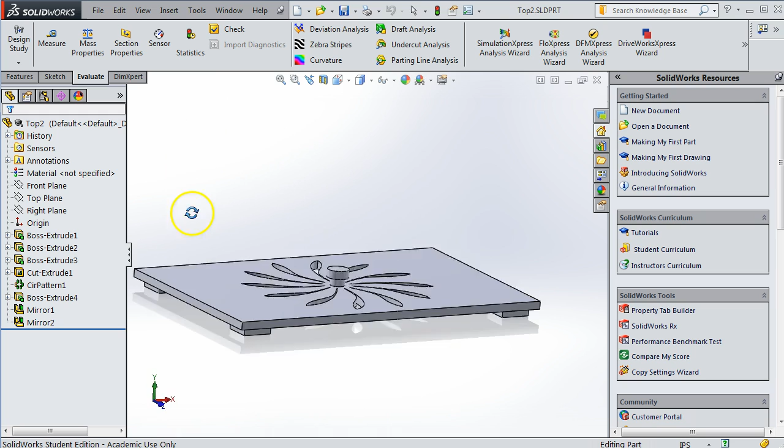Now I actually have two lids that I'm showing because I have in the videos an alternate way of making the lid or the top. So this top you can see is located by those four pads, and I'm going to show the method for the other top as well, which is located by little notch cutouts. That's the alternate method. So as long as you have all of them open, just make sure they're all there, then we're ready to make the SOLIDWORKS drawing file.

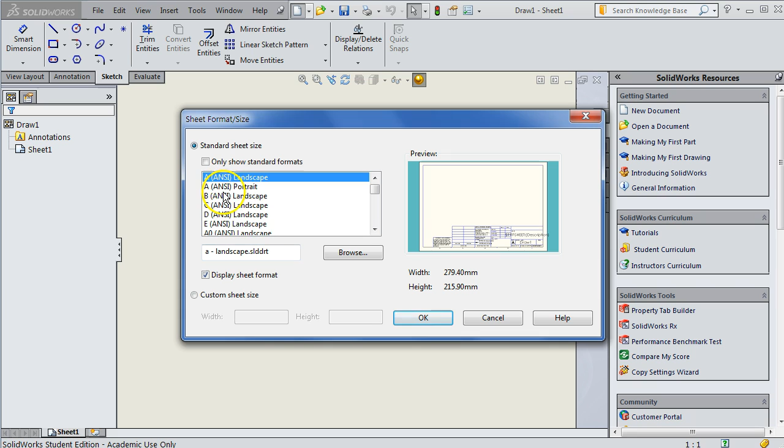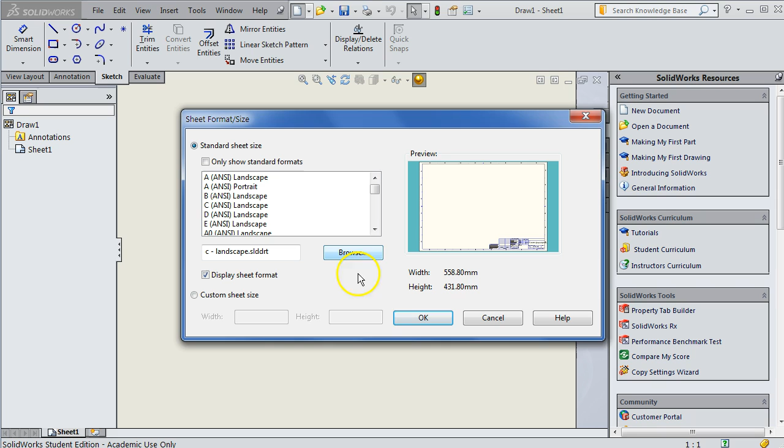So to do that, click on New, and now we're going to select the third option, Drawing, OK. And in this list, I would recommend the ANSI C format. That tends to be the format that uses a 1-to-1 scale. And so that's preferred. It also has plenty of room for our parts. If you don't see that in your list, then maybe uncheck this box. You'll get more selection, or you can always browse for it there. And then we'll say OK to that.

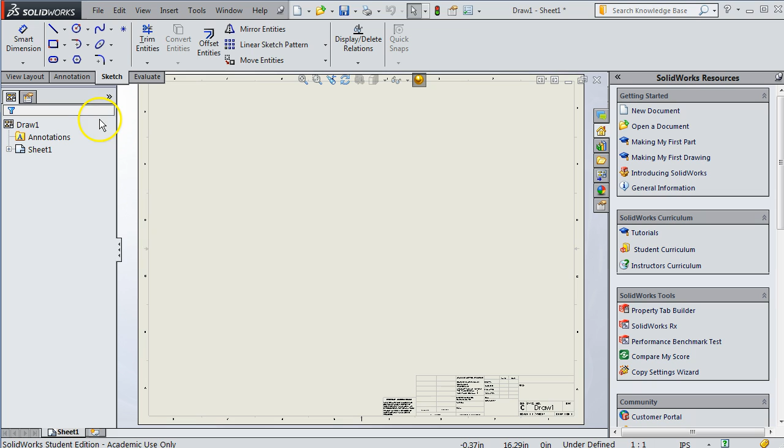Now that sheet format usually, in my experience, comes in metric, or at least on my computer it's doing that. So if you get MMGS here, then make sure you say IPS. Okay. And there's two ways to add part views to this sheet. You can see this is a drawing sheet, like professionals use in industry. It's got a title block and things like that.

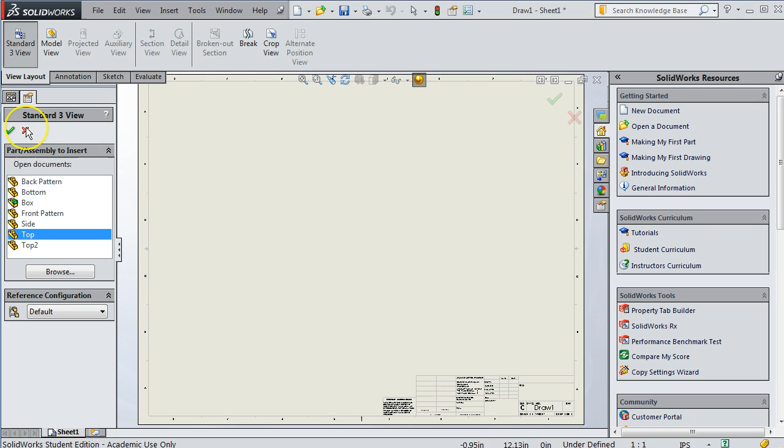The normal way, not what we're going to use, but the normal way is in View Layout. You'd click on Standard 3 View, and all your parts would be here, and then you would pull them in. But for laser cutting, this is not the best way. So I'm going to X out of this. The best way for laser cutting is to pull the parts in from what's called the View Palette.

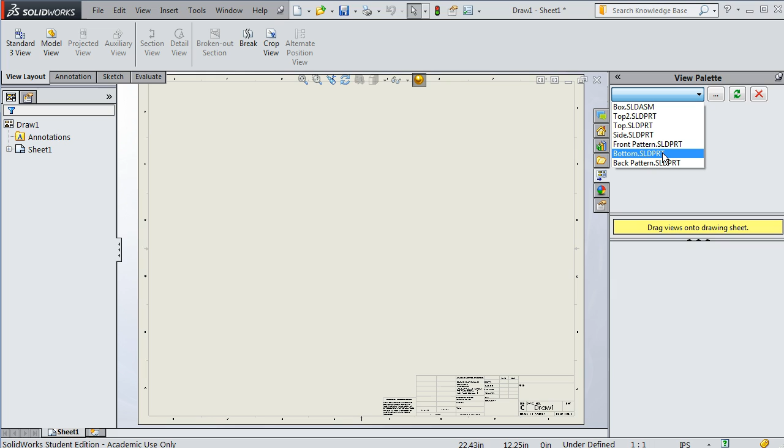So that's right here. So I click that little View Palette icon, and now I get a set of parts in this drop-down menu. So you can see that's the same list I had before. So I'm going to select the bottom of my box first. And the nice thing about the View Palette is it gives you a preview of the view that will be pulled in instead of guessing, which is what tends to happen over here.

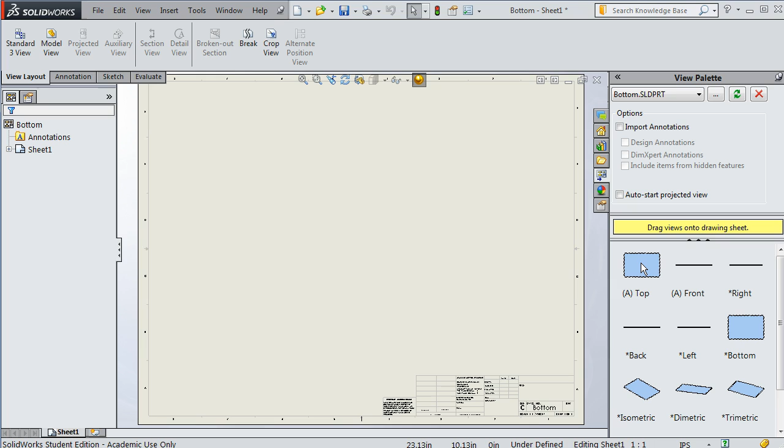So we only need this view for laser cutting. That view and that view do nothing for laser cutting. So I'm going to click on that, drag that in, and then let go to place it. Now, the first thing we want to do when we place it is to make sure this came in as 1-to-1. And the way to be sure of that is I scroll down here and I want to see scale, and I want to see these be 1-to-1. If they came in as 2-to-1 or something else, let me show you what to do.

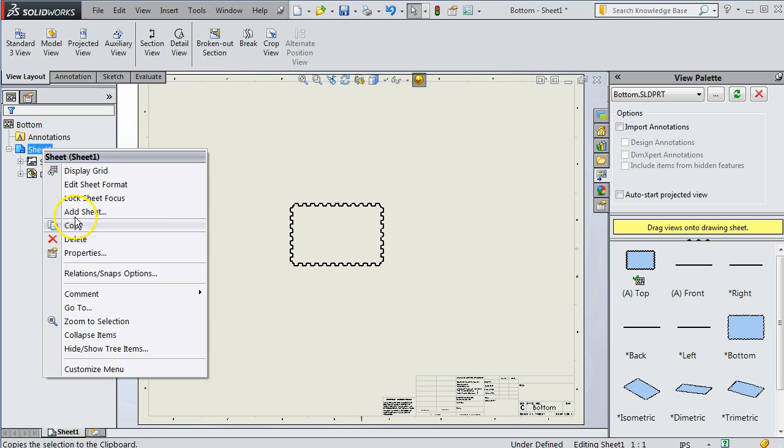I'm going to hit green check to accept that. Right click on Sheet 1 right there. Then go to Properties there. And this should be 1-to-1. If it's not, change it to 1-to-1. So I'll cancel since mine's fine. So we've got our first view, and now let's select some other views. Now your view palette might have disappeared on you after placing that first one. The way you keep it out is the pin. So click there and then click the little pin to keep it there.

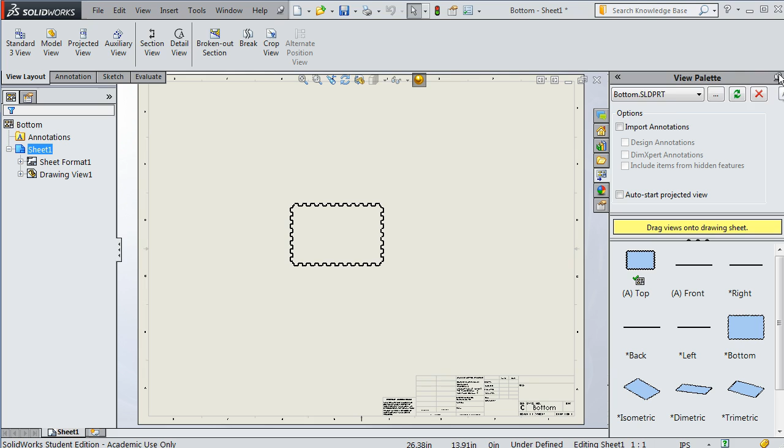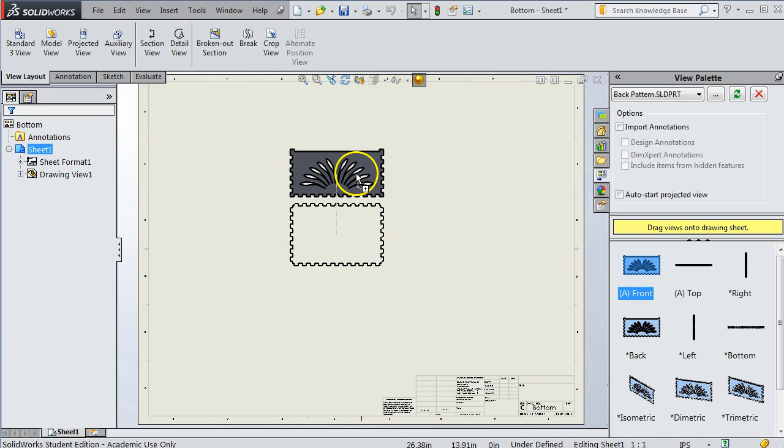Okay, now let's place the views for the rest of our parts. So let's see, I'll take a back. And there are all the views of my back, and I'm dragging in a front, and I'll place that back relative to the bottom, so that would be like that. And let's see, how about I do the front next, and I'll pull the front in, and I'll place that relative to the bottom.

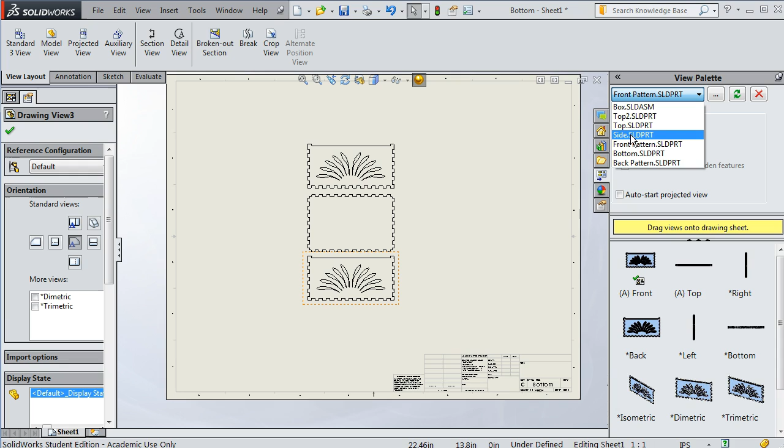Then we'll do sides. Now I only have one side part that I used twice, so I'll click it and pull it once in here to be to the side of the front. Then I'll simply use another view there, click and drag, and let go to place that one.

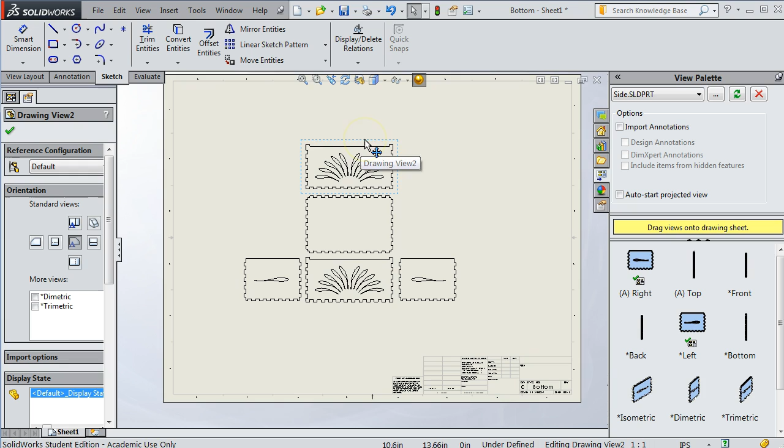Now you may have noticed that when you place these views, you don't have complete freedom where they go. For example, let me move this view. You get it to have the blue outline, and then I'm pulling it up, and you can try to pull it over, but it won't let you. See that? It's controlling the location of these views because it understands there's a relationship between this view and this view. That's why you don't have complete freedom where they go.

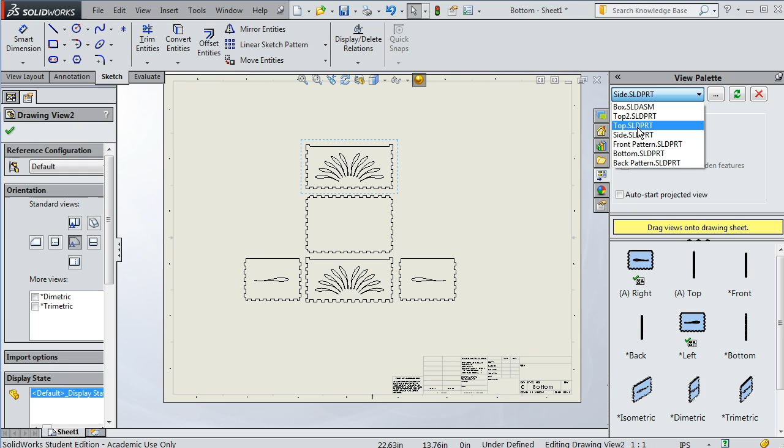Okay, we need a few more views. We have the side, and I'll do both of my tops so that I can show you the method for both. This is the top that actually goes with this set of drawings, so click that and drag it in. You could put it off in a corner for more selection, but once you get close to other views and it understands the relationship, it's going to plop it in a particular spot. So I'll click there to release that one.

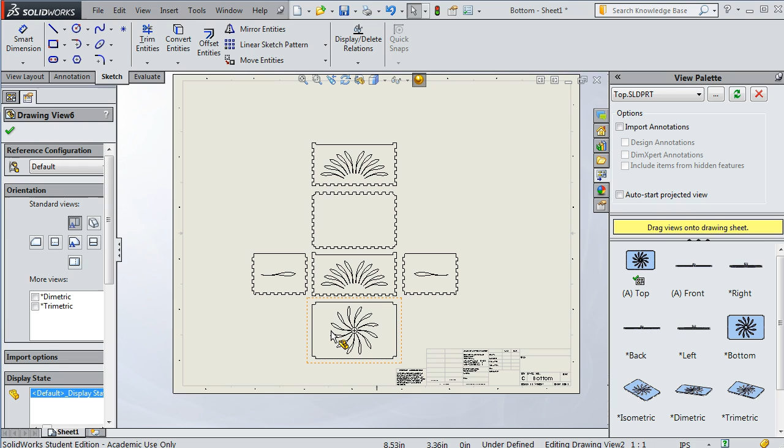And last I'll do my top two, which is the one with the four pads on it. I'll just put it somewhere like there.

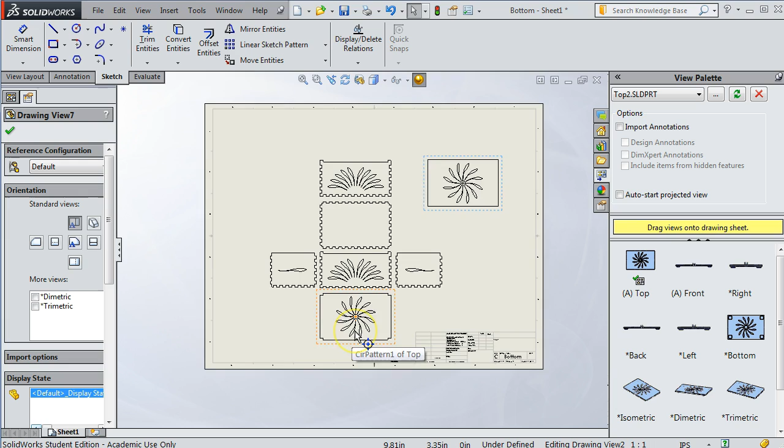There's a few things we need to do to clean up the drawing before we exit. Look for any of your views that have circles, and any circle will probably have this little center line mark. We don't want to laser cut that—that's a drawing symbol. So the easiest way to delete it is simply click it, make it blue, and then hit the delete key, and it's gone.

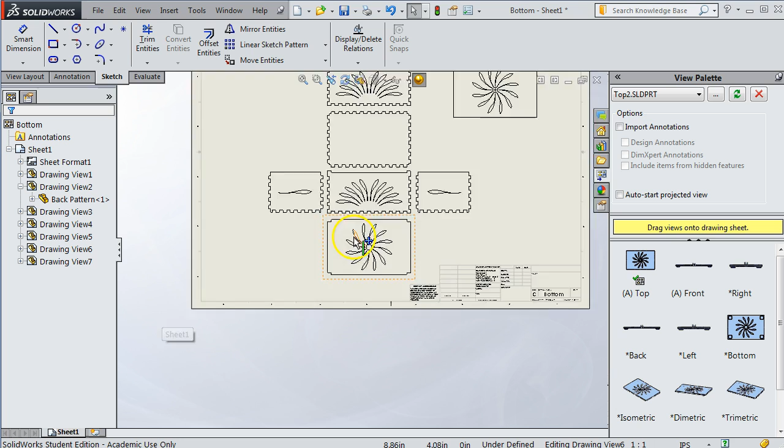So I'll do that for both of my tops, and you would do this for any circle on your part—click and delete. There is a setting if you have a lot of circles to not show them, but most people don't, so I won't go into that.

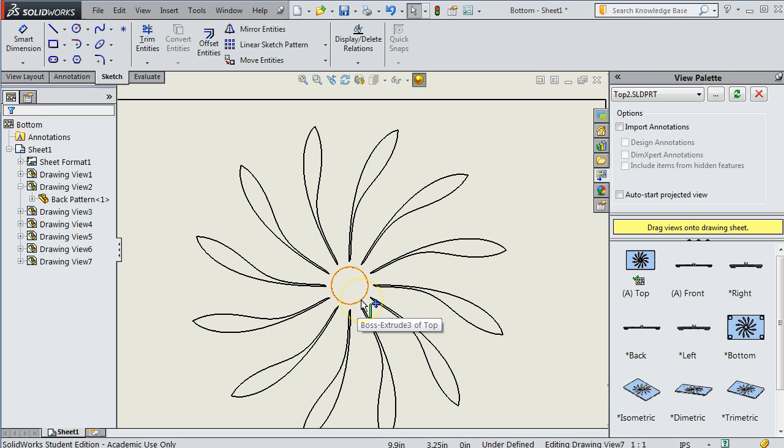You'll also notice that when I look at this handle, I don't see the stem inside it, and that's because of the default way these views come in. So let me click on this drawing to select it—you get the orange line around it. Now let me scroll down here to the display style. The default is hidden lines removed. The one you want to select is called wireframe, which will show every line in the part without visibility questions.

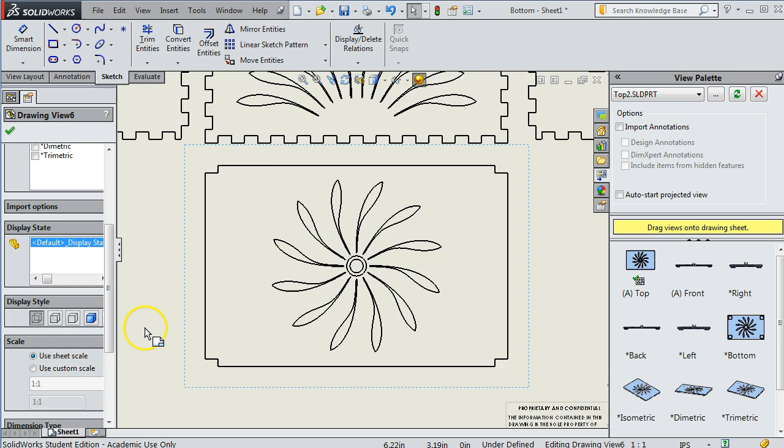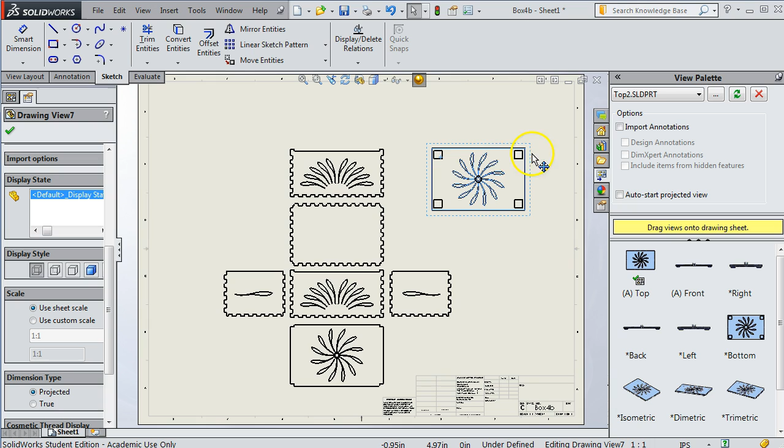So click on wireframe to make sure your stem will show. I also want to set the hidden lines visibility for this lid because it has little squares in it and I need to be able to see those. So I select that view, scroll down, and click on wireframe for the display style. Now you can see it's going to show the little locating squares, which is important because we want to laser cut those later. Okay, I'm hitting escape to unselect that.

Next we want to save in two ways. First I want to save this SolidWorks drawing file. So File, Save or Save As—this is a SLD DRW file, and you can give it any name you like. SLDDRW, and save that. I've already done this once, so replace it.

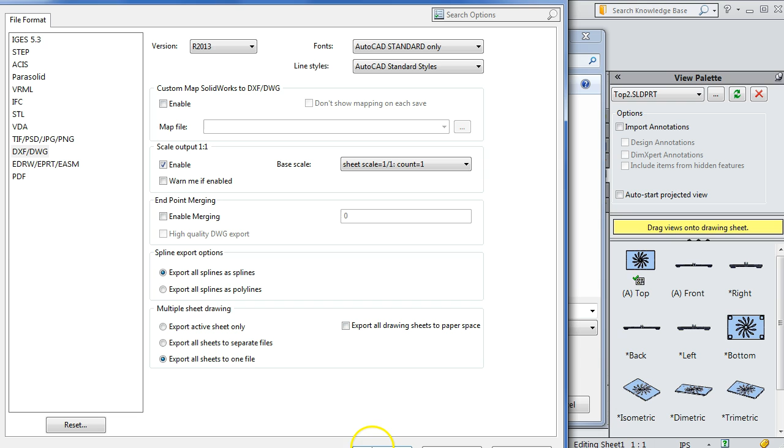Now the important save for laser cutting is we want to save this as a different format. So I go to File, Save As, type DWG. This is a very old format, and it's the one that AutoCAD and the laser cutter will understand. Make sure you click on the Options button and make sure the Scale Output is enabled and that these say 1:1 as well. The OK button is just off my screen here, but you can see me click on it right there.

If I close SolidWorks now or minimize it, I'll go back to my list of files here, and you can see it created this SLD DRW file, and it also has this DWG file I just created. If you're on a USD lab computer, you'll have progeCAD on all of those machines.

So you can right-click here, then open with, then progeCAD. If you're on your own computer, let me get this started, so I'll try it. This is a trial version.

If you're on your own computer, you can download a trial package from progesoft.com, downloads section, and that'll work for 30 days. When progeCAD opens, it'll look like this.

This is the SolidWorks drawing file that's now exported, and we need to clean this up and prepare it for laser cutting. There's a number of steps to do.

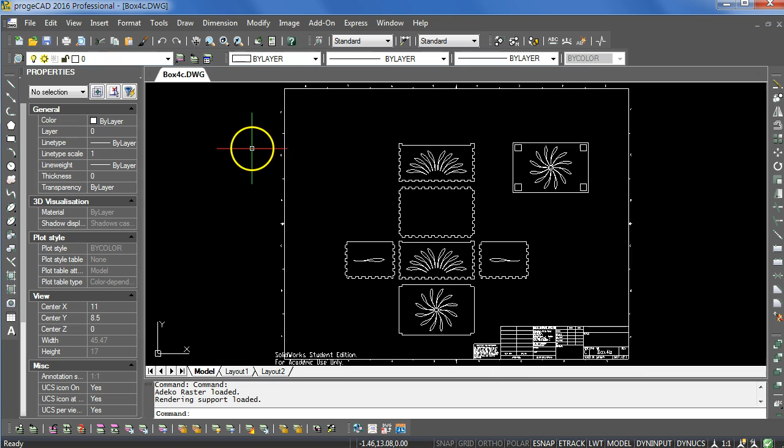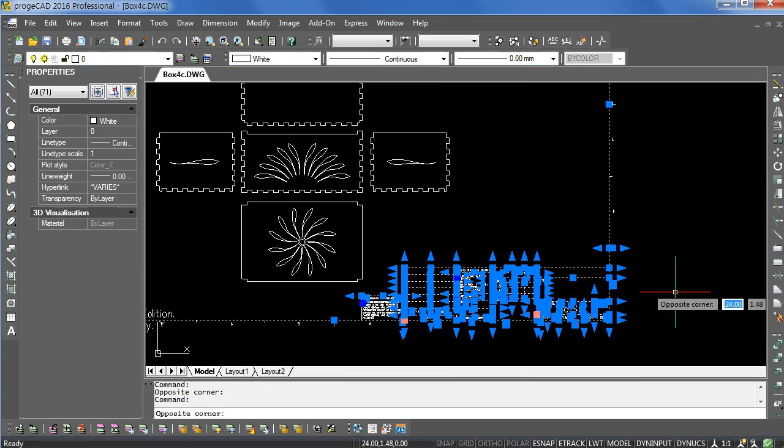First thing I want to do is eliminate these lines. Let me show you a feature of how things are selected in AutoCAD, progeCAD, and other clones. If I select by clicking here and dragging to the left, then clicking again, notice it selected everything within that box, and also things partially within the box. Now contrast that - I'll hit Escape to unselect. Contrast that with clicking and dragging from left to right. Now it selects stuff that is only entirely within the box, and doesn't even select this line since it wasn't fully within the box. That's a handy and important way to understand how selection occurs in most CAD packages.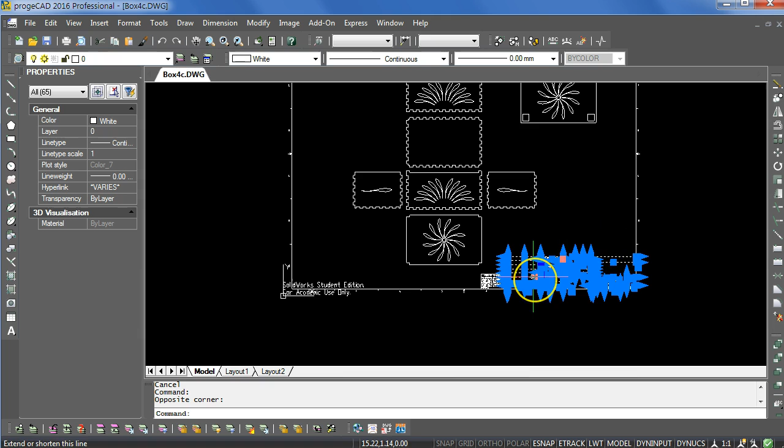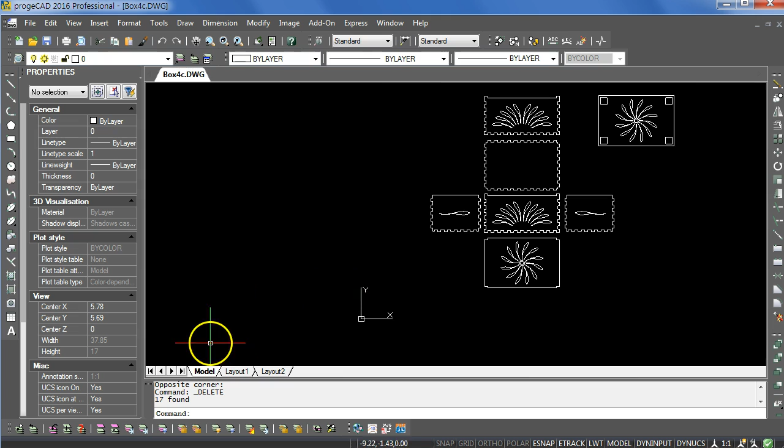We want to delete that because we don't need it in the laser cut file. So click and drag to delete, and delete - just make sure you don't delete any of your important views. The last thing shown is the coordinate system. That cannot be deleted. There is a way to hide it if you want to, but it's usually not much of a problem, so I'll leave it.

Probably the single most common problem when we export things from SolidWorks to laser cutting is that the scale of these views is off. It can be off by 1/2, by 2, by 4, or by 25.4, which is of course the metric to English conversion.

So to check that we're working with a valid file for laser cutting, let's check a dimension. Go to the dimension menu and then go to linear. Hover your mouse near a corner and you'll see it grab onto that. Click there and then click there, and check that's the dimension you intend to occur.

If you got a metric number, that's probably because in the SolidWorks drawing file it was set to a metric scale, so you could re-export it in that case. If you got a half scale or a double scale, that's probably because the view scale was wrong in SolidWorks, but in another video I'll show you how to rescale right within progeCAD if that happens.

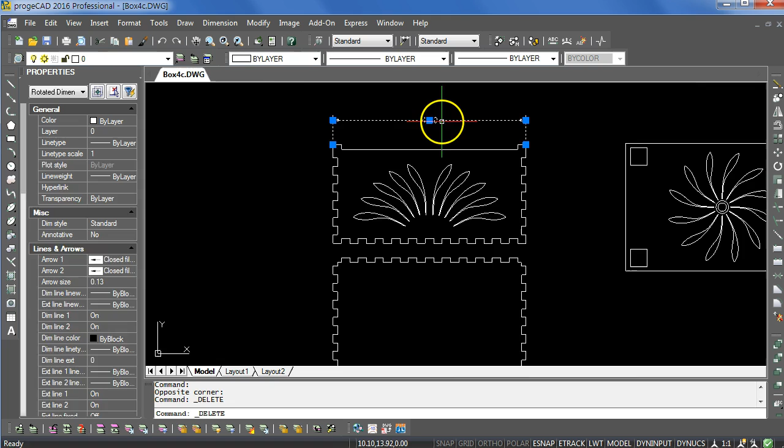So that's correct, so I'm going to select that and delete it. My scale is now correct.

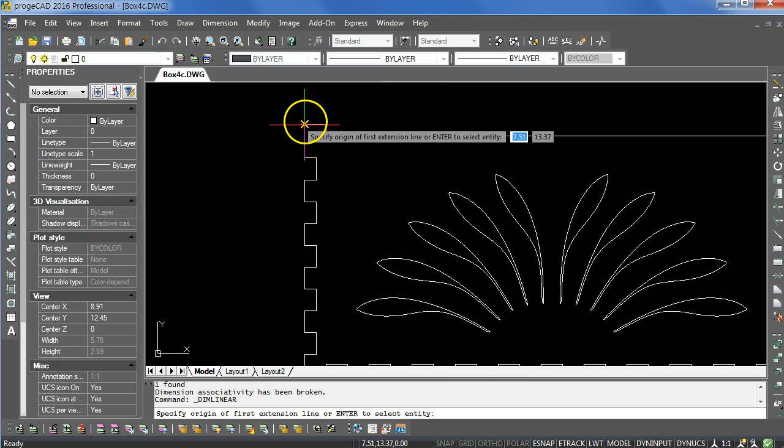You'll probably notice that the way selection is done can vary in progeCAD. What I mean is, will it grab onto that corner? So if I want to draw that dimension again, here it's grabbing onto the corner, snapping to it. That snap behavior is sometimes desirable and sometimes not. The way you control that - I'll hit Escape to get out of this - is down here. See all these gray and white words? These are various ways in which selection and drawing are controlled.

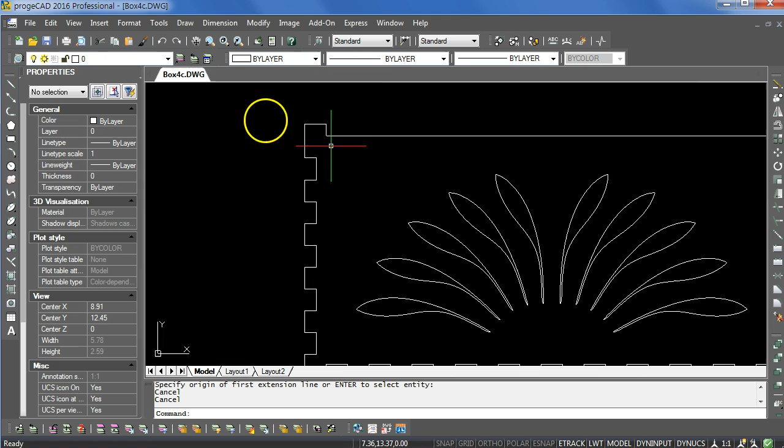The one controlling that last behavior is called Entity Snap, or eSnap. If you want to turn it off, just click it and make it gray. I would recommend all of these be off: Snap off, grid off, ortho off, polar off, and eSnap off. That'll give you the most flexibility for placing parts for laser cutting. In other kinds of modeling, you would want some of them on, but for now make sure all of those are gray.

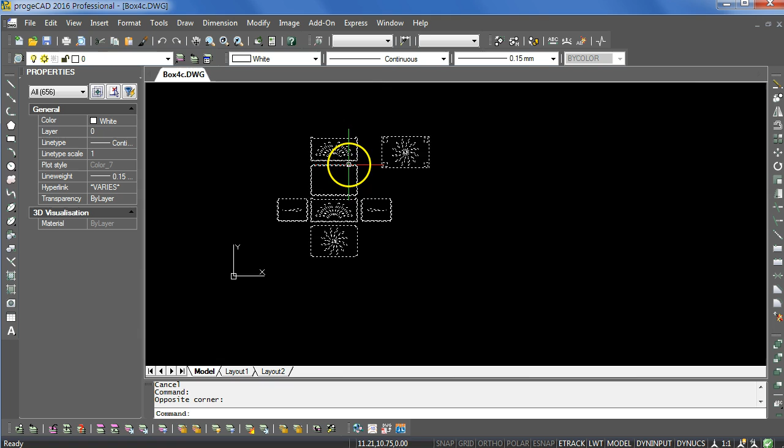Some other laser cutting preparation: let's get all of our lines within view, and let's select everything. So they're dotted lines you can see when selected, and sometimes you get colored line markers. It doesn't really matter which one occurs.

Notice the line width - that's right here, and this is the default for SolidWorks output, 0.15 millimeters. That needs to be changed to 0 in order for the laser cutter to interpret this drawing properly. Had we left it at 0.15, the laser cutter would interpret those lines not as lines, but as pictures, and it goes into a completely different mode - not one we want. So let's select 0, and it will understand those are lines to be cut or etched.

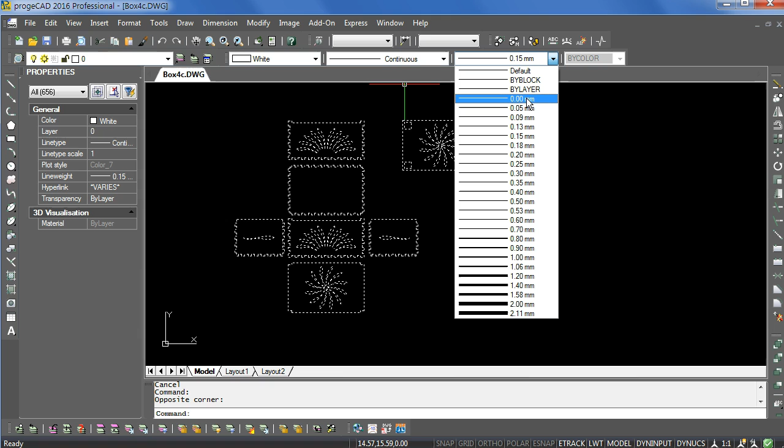Okay, so now they're all 0. I would recommend first setting them all red, and then we will change those that we want to be etched to white. So they're all red. Now a red line will be a cut line.

It'll have full laser power at a slow speed. If there are lines you'd like to be white, we'll select those one by one. But while it's all selected, there's one more command I'd like to do. AutoCAD and progeCAD work by icons to draw things, but they also work by text input right here, particularly the command window. This is very handy. Some commands are either most convenient or only available by this method.

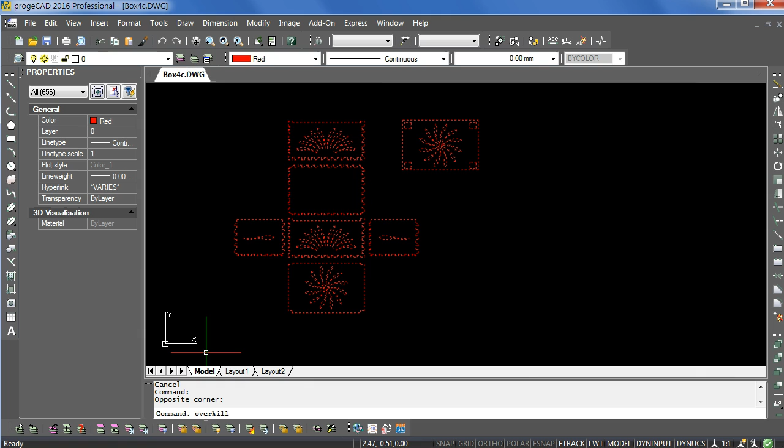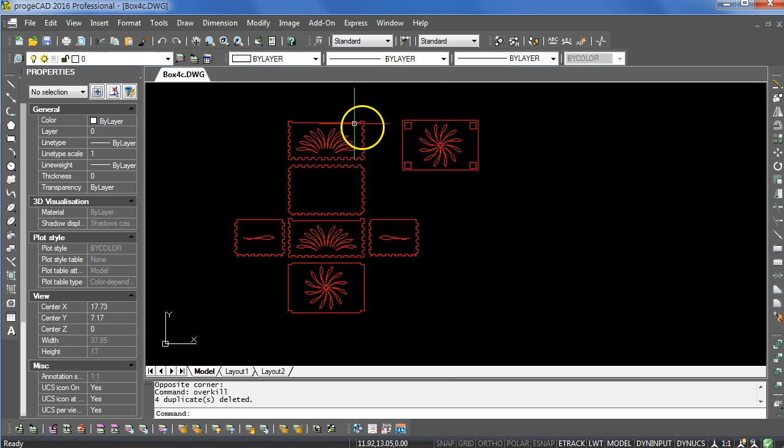The command I want to type is overkill, one word, hit enter, and the defaults for this dialog box are fine, say OK. Now it's searching through all of those lines looking for lines that were on top of each other, duplicate lines. It found 4 duplicate lines and deleted them for us. Typically I find those duplicate lines are due to the stem, because for some reason SolidWorks outputs 2 lines, one on top of the other. So we got rid of those lines.

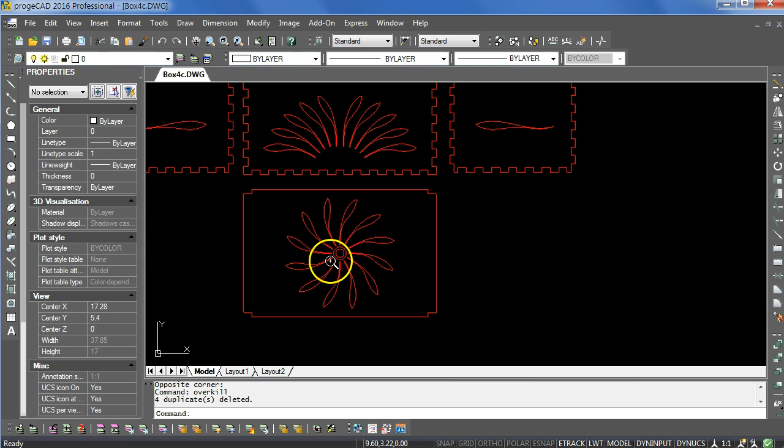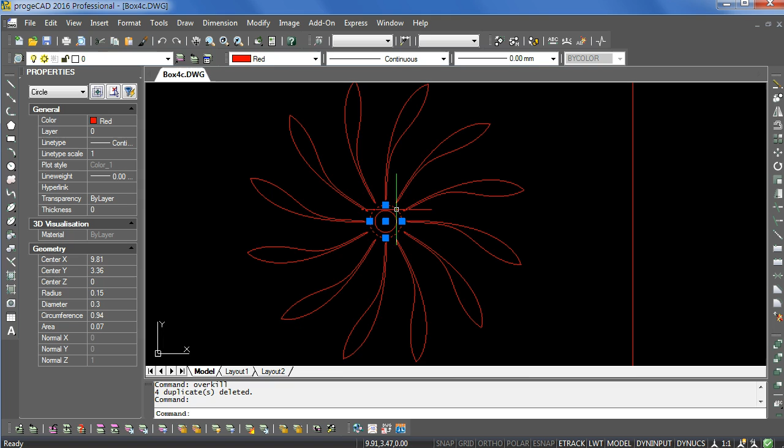Our next step is to correct the lid, the handle, and the stem on the lid. Right now it's just giving you a view of this top or lid as seen from above, but we don't want to laser cut that—that's going to put a hole in our part. So I want to get the handle of the lid off of that part, and I also want to get the stem within it off of the part as a separate part.

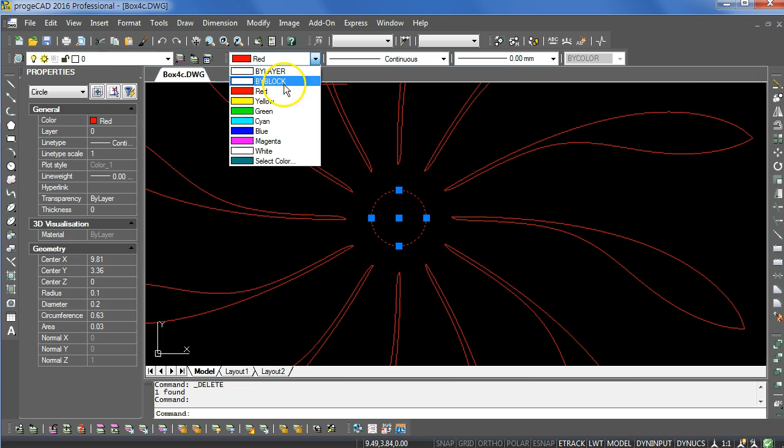So I've selected them both. Now I'm going to hit Control-C for copy, Control-V, and click again, and there they are. I'll hit Escape to unselect the middle parts, and delete this one, because I don't want any line or laser cut there. But I would like a locator to tell me where to put the stem, so I want to change that line from a cut line, red, to a white line. I go down to white, and now I have a white line there.

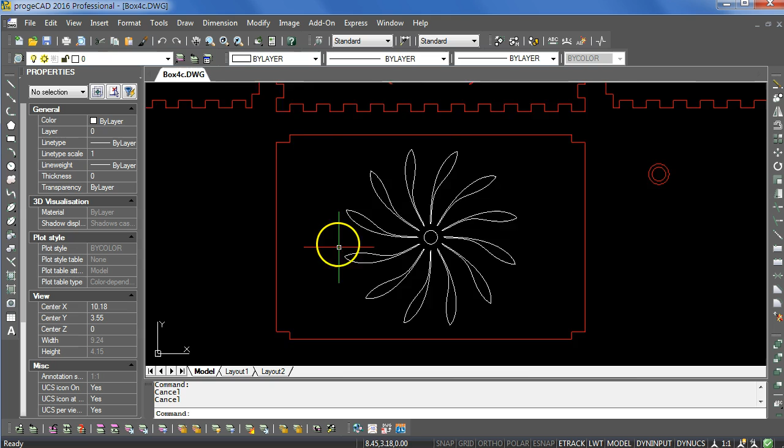You can now select any lines you want to be etched and make them white. For example, if I wanted these to be etched instead of cut all the way through, I would select them all and make them white, and hit Escape to unselect. So I've pulled off the lid, handle, and stem.

If you have this kind of lid or top, we need to pull these off so they're cut as unique parts. For that, you really only need to pull one off. So I'll select that, copy, and now paste it with Control-V, and put it right here. Then you can just paste it 4 more times. Paste, paste, paste. Okay.

I realized I did a step there I didn't show you intuitively, and that's how to pan. Pan is done with the middle mouse button—I click it down and I can move around my 2D screen. That's kind of like rotating in SolidWorks.

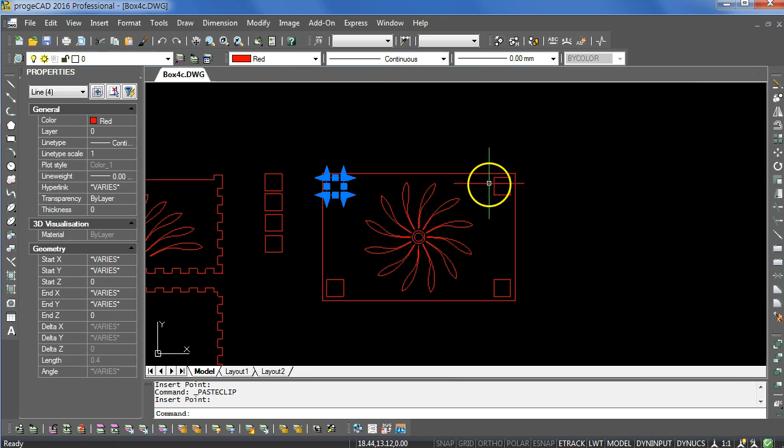Okay, now these we for sure don't want to be red. We don't want to cut holes there. Whether you have them white or nothing is dependent upon the rest of your design. So first let me fix this so it's correct. We'll get rid of that one. I'll make this one white.

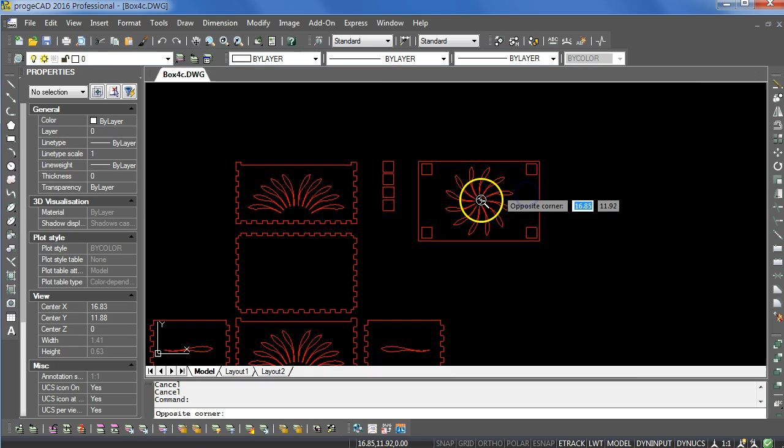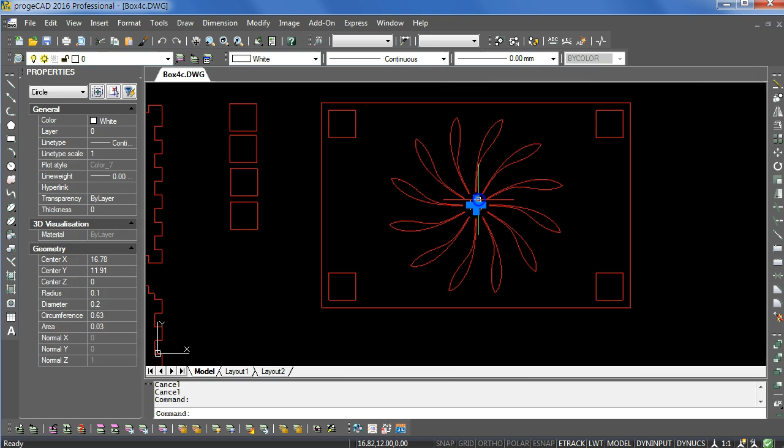Now if I want that to be white and used as a locator, then this view is going to be the outside view of the top or lid. And if it's an outside view, then these must be gone—I can't have them at all. But if you had no etch lines on your top or lid, I'm going to delete this one. If you only had red lines, then you could make these white, and now that will be the bottom or inside view of the lid.

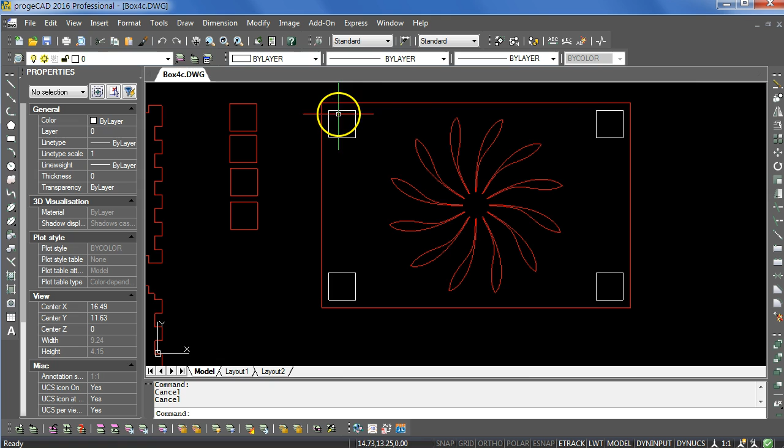So if I make those white, these will help you know where to glue them on. It's really not a big deal if you don't have them here at all—we have another method of locating them, but it's also nice to have them show where to put them. So if you have a lid located by corner pieces, we need 4 of those corner pieces outside the part, and we either need the locators here white or not visible at all. If they are white, nothing else should be white, or else it would be forced to be the inside.

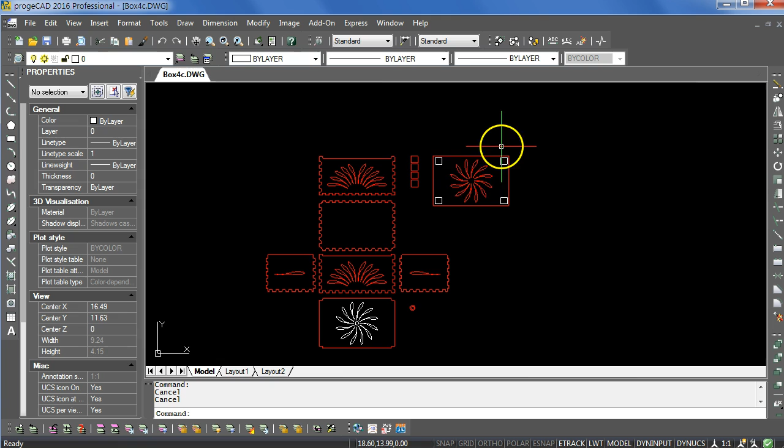Okay. Now we find that small pieces like this or smaller tend to get lost in the laser cutter. There's a honeycomb table that they can fall through. So I always recommend making 2 copies or more of those parts. So I'll just paste another set right there. So that's copy, Control C, Control V.

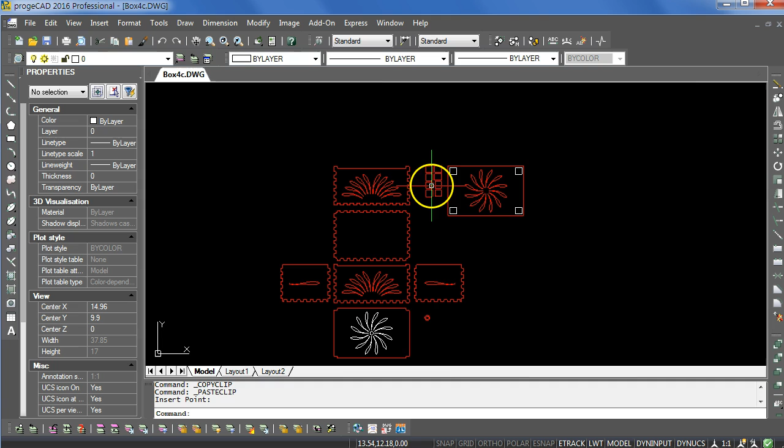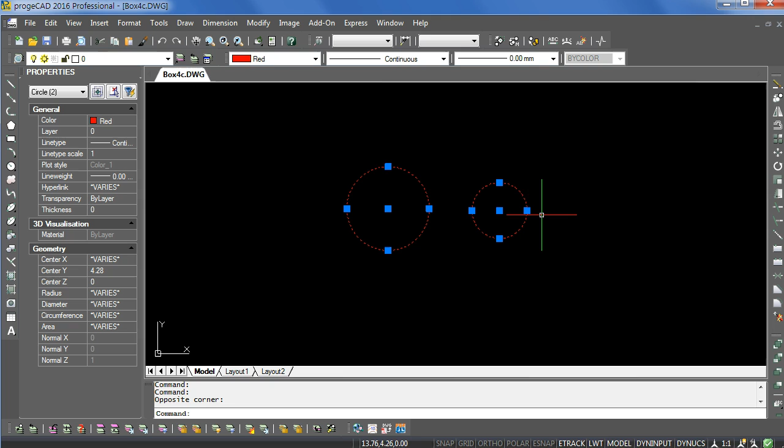Similarly for the handle, I don't want this as I've seen it here. This will have a cut line and it'll have another cut line right inside of it. I want this as a separate part, so I need to drag it out over there. And these are very small. These are the easiest to lose, so I'm going to make 3 copies of these. Copy, paste, and I'll put one there, and then I'll make another one there.

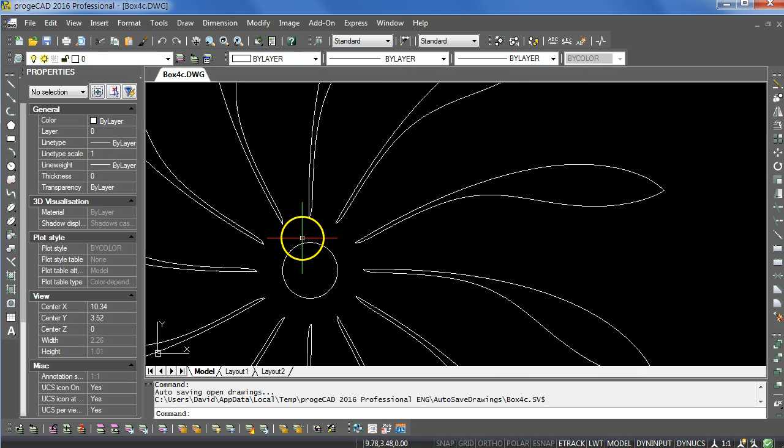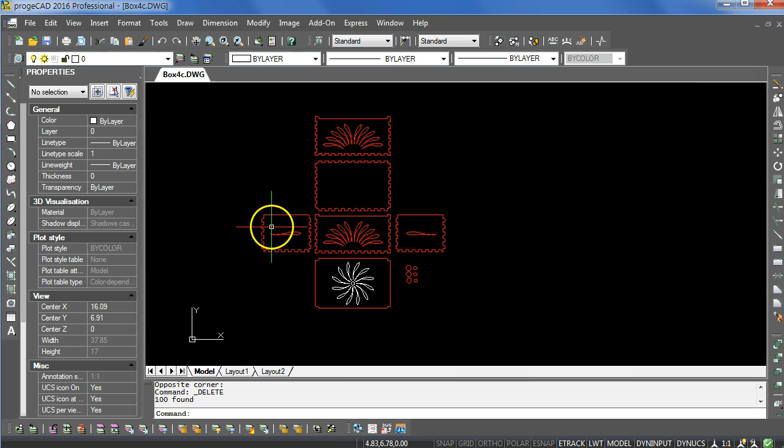Okay. So your handle and stem need to be red and separated from each other, and you don't want a handle in addition to the stem there. My last step for preparing this is to arrange these parts so that they take up less room on the wood to conserve the amount of wood. So first I'm going to delete this because my particular box doesn't use that design, so I'm just going to delete all that. You can see my layout right now is not super efficient because I have this little part off to the left, and I'd like to group it more with that one.

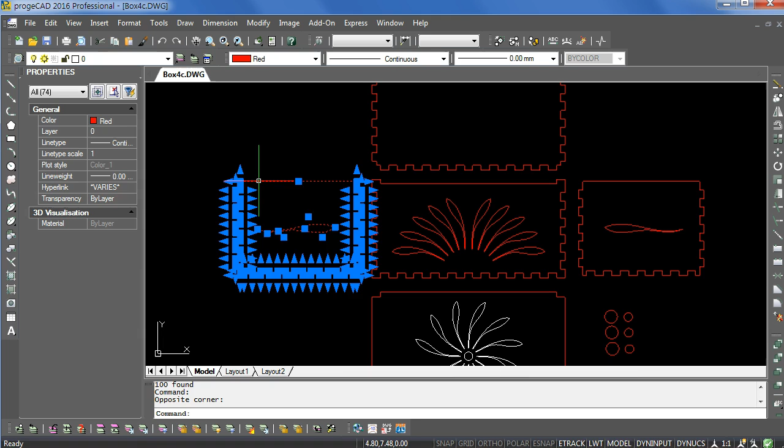So let's move that. So I'm going to select that, and now you can either drag it off from a line, or you can say Control X for cut, and then go to where you want it and say Control V, and then paste it into place. And now you notice progeCAD has no intelligence about where this is placed, so you can put it anywhere you want. So I'll put it there.

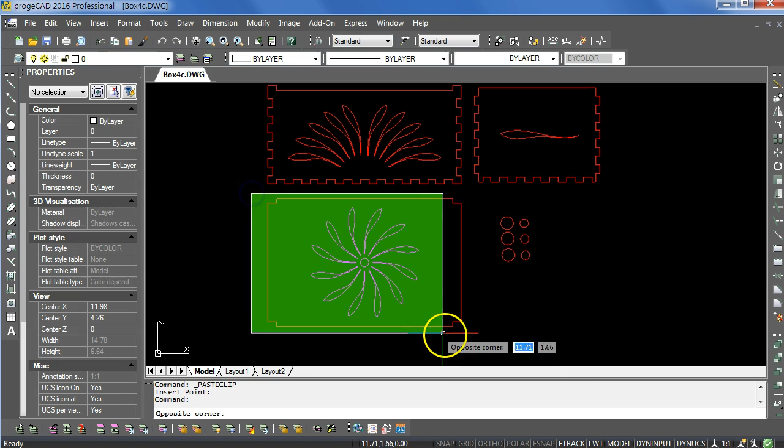Okay. I could make this probably a little more efficient if I wanted to by rearranging these parts. So for example, in this one, I might want to move this piece here down to this corner, or this lid up to that region, so that it takes up a smaller amount of wood. And I also might want to move them a little closer together. So a good separation between the parts is probably about a finger width, or 2/10 of an inch.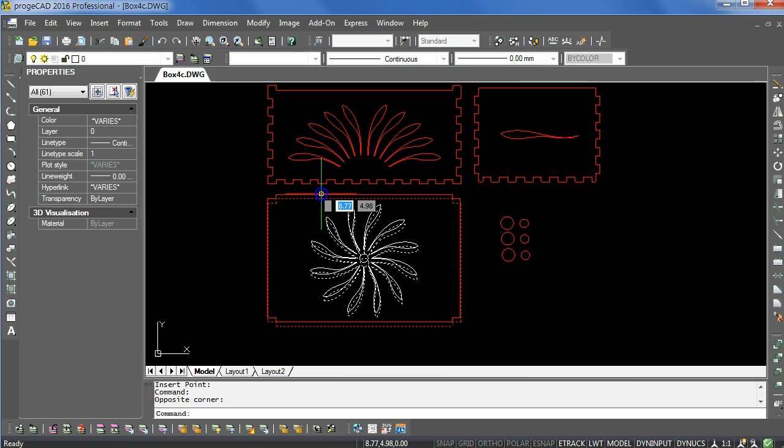So you can click and then drag that a little bit closer. I wouldn't get it super close. If it's too close, then the laser cut lines from the upper part can burn themselves onto the lower part. But certainly don't have it that far away. Okay, so roughly 2/10 of an inch just by eye. And I've already placed the others pretty close, so I don't need to do that.

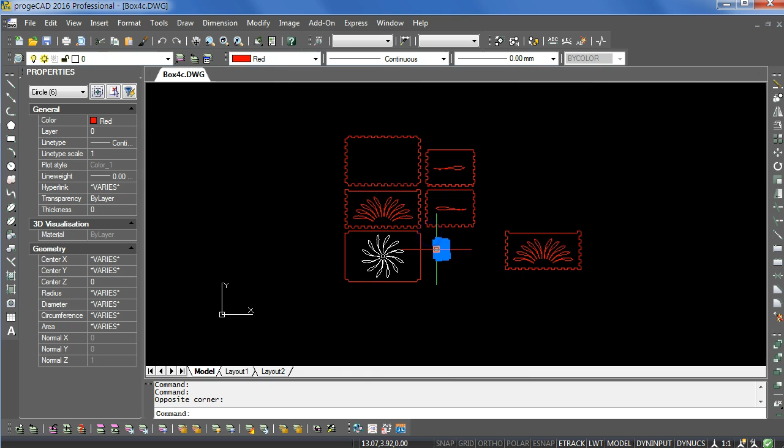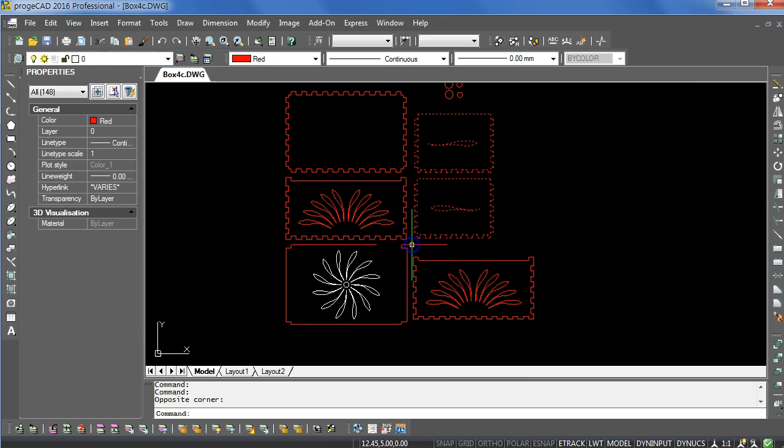Now I might want to move this part down to the bottom corner, down to there. First I'm going to move these out of the way. And those I'm going to cut because they're harder to grab. And I'll put those into the upper portion, and then we can rearrange that as well. And now I'll move this a little closer, and I'll move these down, and we're just moving things around to take the least amount of wood, and then I can move those down as well. Okay, and that preserves wood for another box that might need that space there.

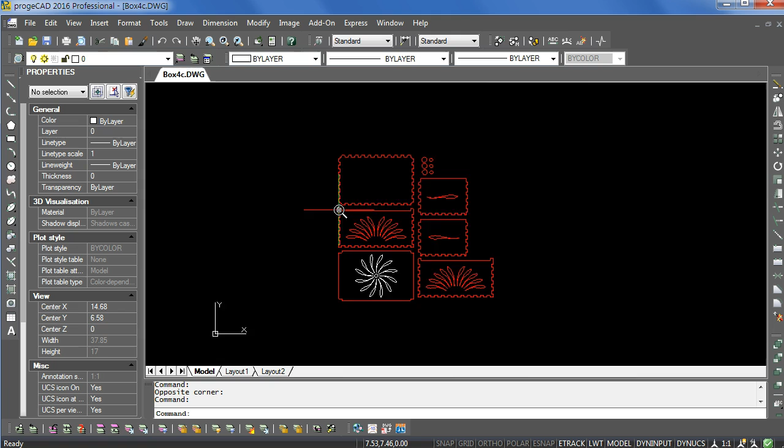So to review the changes that we made to the DWG file, remember we selected everything. We made all the lines 0 millimeters wide. We made most of them red and then some of them white. We used the overkill command to eliminate duplicates. We checked the scale of the drawing. We measured an edge to make sure that it was roughly the correct dimension and not twice or 25.4 times the size. We moved the handle and the stem off the part and made the stem locator white.

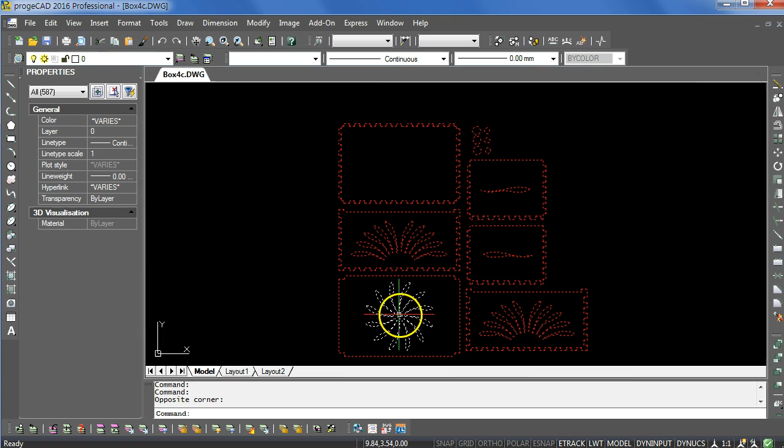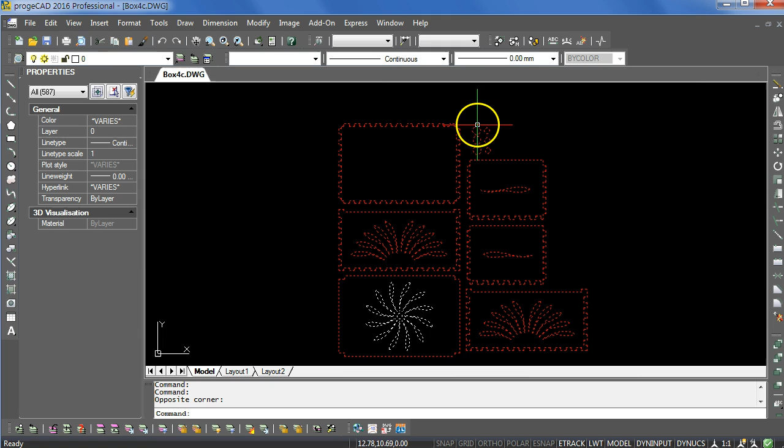If you had squares for location here, then we moved those off the part and either made them white or eliminated them, depending on the rest of that top design. We arranged the parts for minimum waste so that we can have other boxes take up space here and here. And we duplicated the smaller parts so that they don't get lost. And last, we deleted the border around the whole thing.

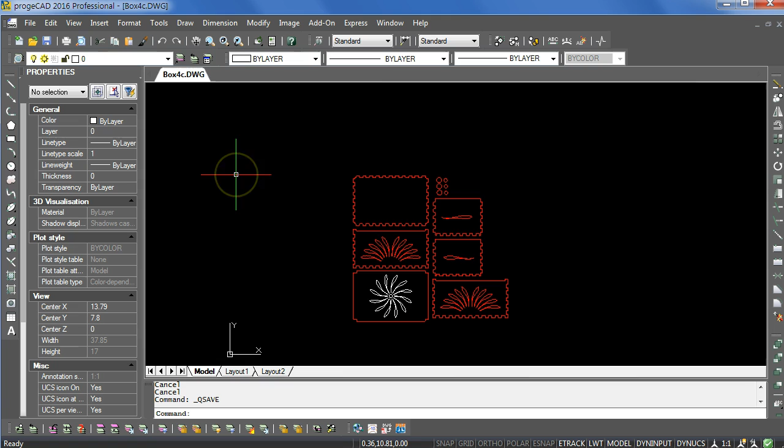And so once that's set, I'm going to hit escape to unselect those. We can save this as our file ready for laser cutting. So I'll click save, and that's done. And now the next step is to combine your file, this set of drawings, with 3 other students' files to put 4 of these on one laser cutting template. And I'll show that in the next video.